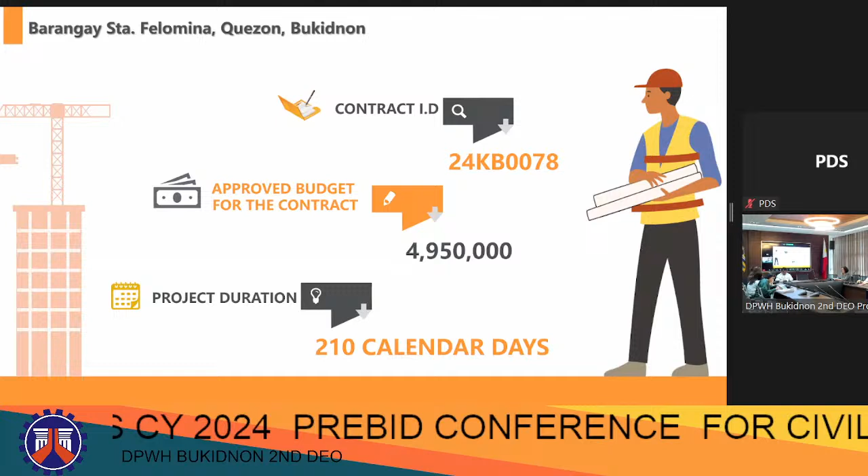Good morning, everyone. So, next, I'm going to present number 2 in the list of last number 8. Construction of multipurpose building, City Hall, Barangay Santa Felomina, Quezon, Bukidnon. With contract ID 24KB0078, approved budget for the contract 4,950,000. Project duration 210 calendar days. The location of the project is 25.2 kilometers from Quezon Municipal Hall and 46.2 kilometers from DPWH Bukidnon Second DEO.

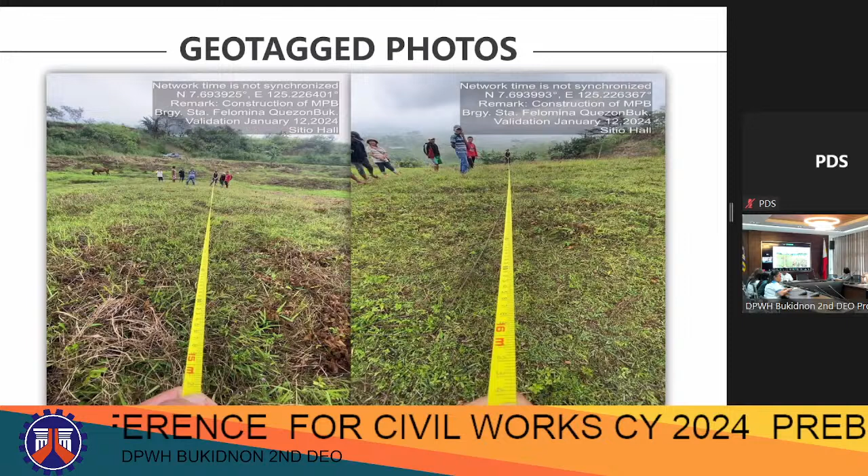These are the geotag photos. So, it has been validated. Next is the perspective.

For the scope of work: construction of one-story barangay hall with floor area of 146 square meters, consisting of complete structural components - footings, columns, roof beams, and slab.

Complete roofing components: roof truss, framing, purlins, pre-painted metal sheets and roofing accessories, fascia board, gutters, and flashings. Complete exterior and interior walls with cement plaster finish and painting works.

Installation of complete doors and windows. Installation of ceiling for exterior and interior with painting. Installation of tiles for interior floor area, toilet and toilet walls.

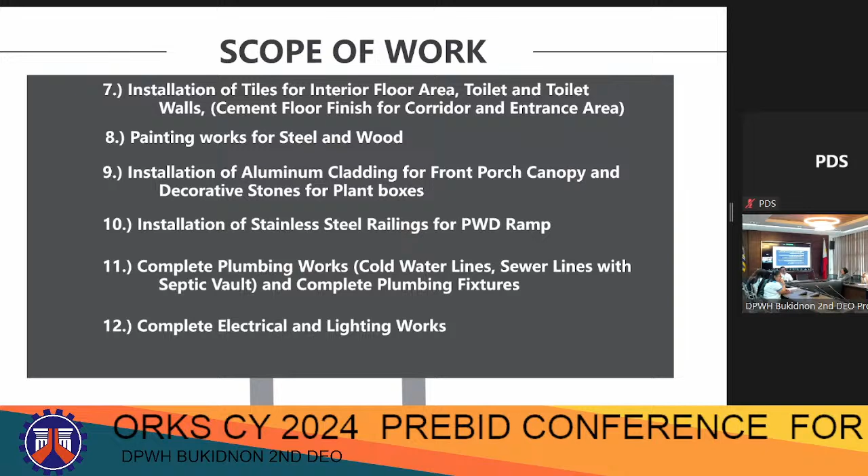Cement floor finish for corridor and entrance area. Painting works for steel and wood, installation of aluminum cladding for front porch canopy and decorative stones for plant boxes, installation of stainless steel railings for PWD ramp, complete plumbing works including cold water lines, sewer lines, and septic vault, and complete plumbing fixtures. Complete electrical and lighting works.

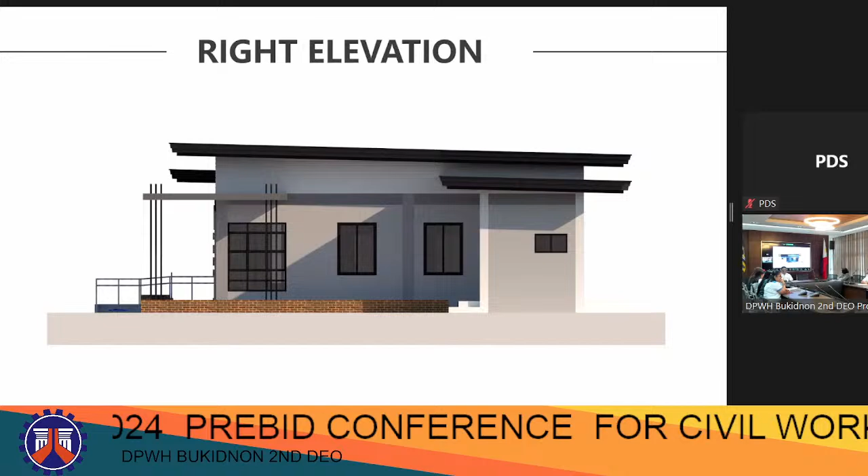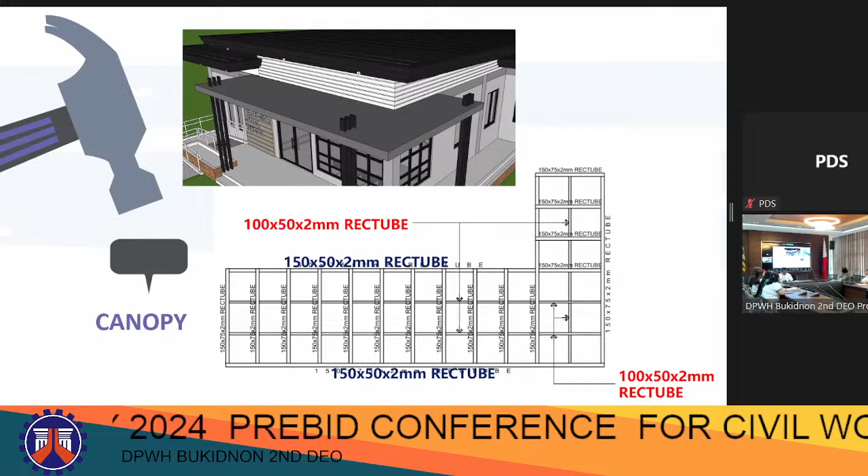For the canopy, we used 150 by 50 by 2mm rectangular tube as the main member, same for the web. For the ramp details: 38mm stainless handrail and 38mm stainless baluster.

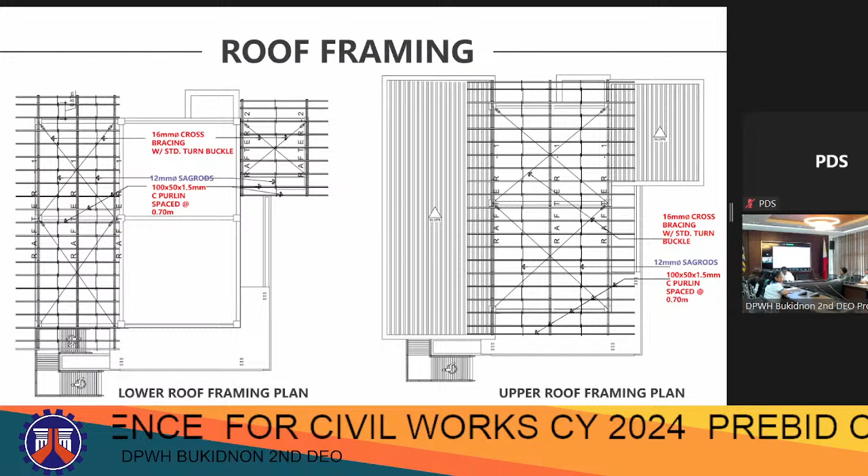For the roof framing, 16mm is used for cross bracing, 12mm for the sagrods, and for the purlins it's 100 by 50 by 1.5mm.

For the rafter, top and bottom, we used two 50 by 50 by 4mm angle bars, and for the web, two 38 by 38 by 4mm angle bars.

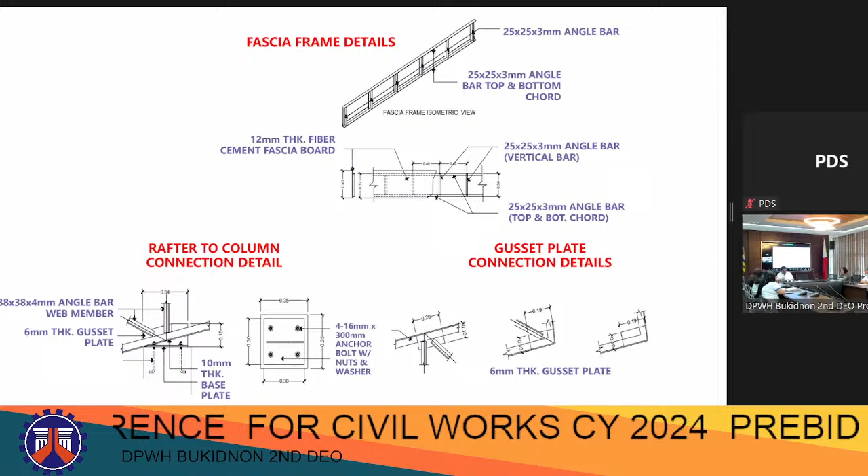For the fascia, 25 by 25 by 3mm angle bar and 12mm thick fiber cement fascia board were used.

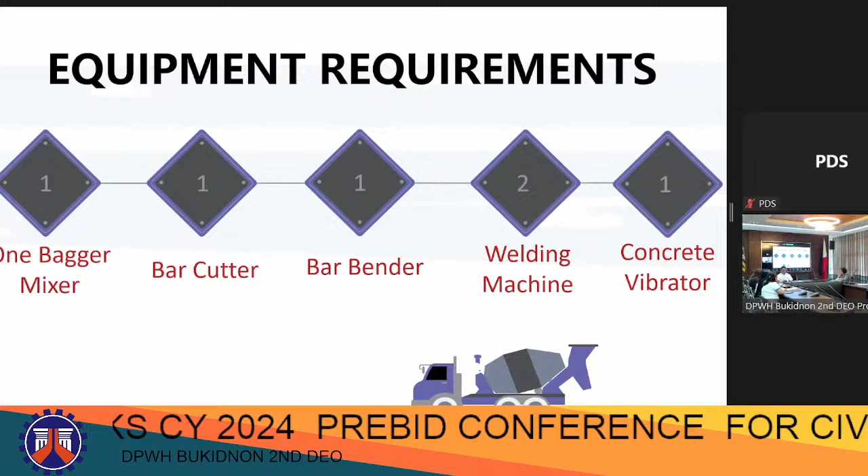So the next one in the diagram is number 8. We're beside number 2. Yes. The next is number 8 on the list.

Construction of multi-purpose building, covered court, Barangay San Roque, Quezon, Bukidnon. Contract ID 24KB0084, approved budget for the contract 4,950,000 and the contract duration is 210 calendar days. The location of the project is 10.80 kilometers from Quezon Municipal Hall and 31.80 kilometers from DPWH Bukidnon Secondary Hall.

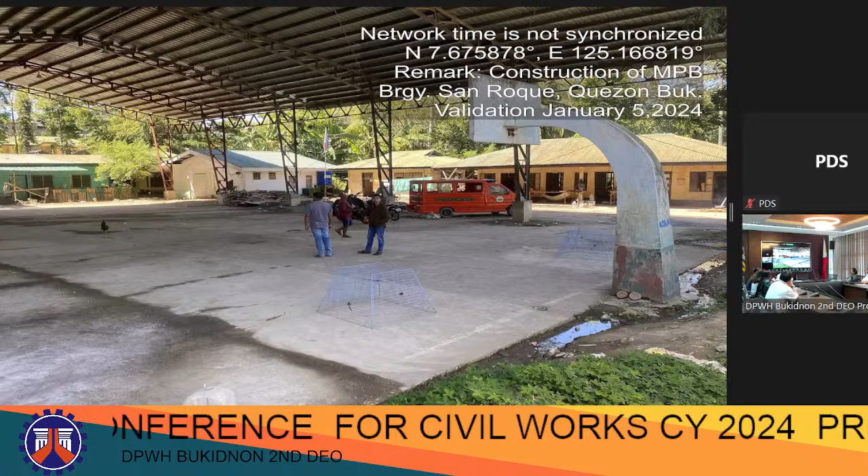Next is the geotag photos. This is the existing covered court. It doesn't have this perspective yet.

The scope of work here is the provision of canopy roofing and steel framing, two sections: 2.56 meters by 20.81 on the short side, and on the long side 2.56 by 32.50. Only one can be placed here because the new legislative building is on the other side.

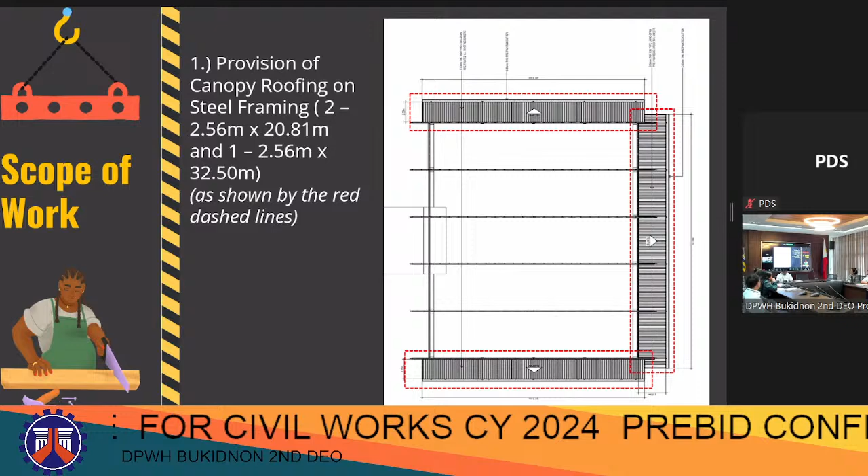Provision of 5-layer concrete bleachers on the long side, 18.5 meters in length. Provision of spandrel on both ends. Provision of 2 sets of movable basketball rings with complete accessories.

Floor topping on existing concrete slab. Provision of complete roofing accessories: gutters, flashings, and downspout. Complete electrical and lighting works. Complete painting works for masonry, concrete, bleachers, and steel.

So here is our floor plan. The slab is existing, but we will do floor topping. For the shed roof plan, we used 0.50mm thick rib type and gutter.

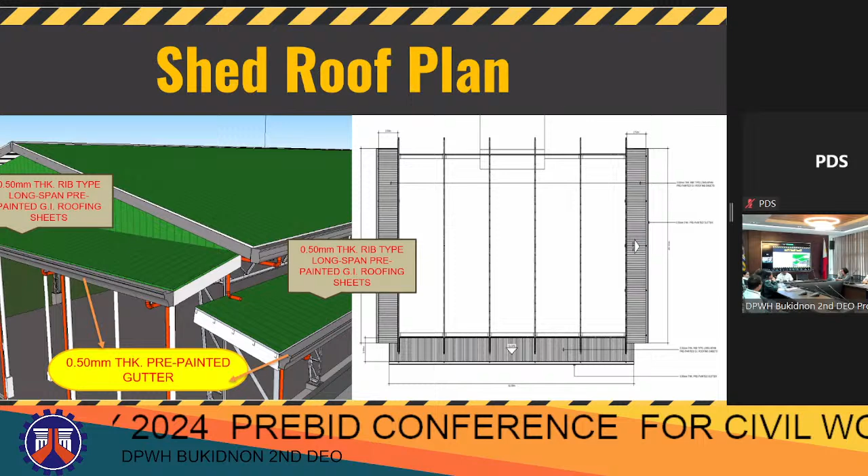For the shed roof, we used 45 by 45 by 4 angle bar on top and bottom, and for the web, 38 by 38 by 4mm angle bar. For the spandrel details, we used 75 by 50 by 2mm C-channel.

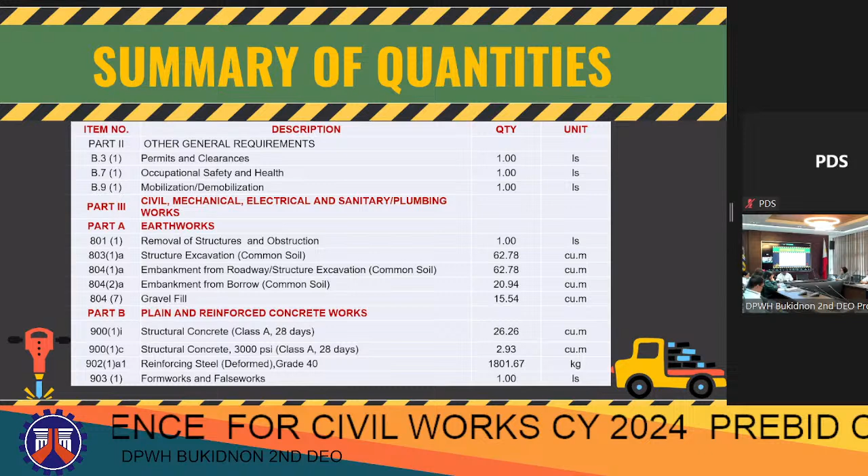For the summary of quantities, it was passed at the bid bulletin. For the equipment requirement: 1 jackhammer, 1 cutting outfit, 1 concrete saw, 1 plate compactor, 1 bagger mixer, 1 bar cutter, 1 bar bender, 2 welding machines, 1 cutting outfit. That's all.

Questions with respect to budget number 4? Yes.

Good morning, everyone. I will be presenting to you the fourth project for this Prebid conference entitled Completion of Water System, Sitio Man Ohay, Barangay Dologon, Maramag, Bukidnon.

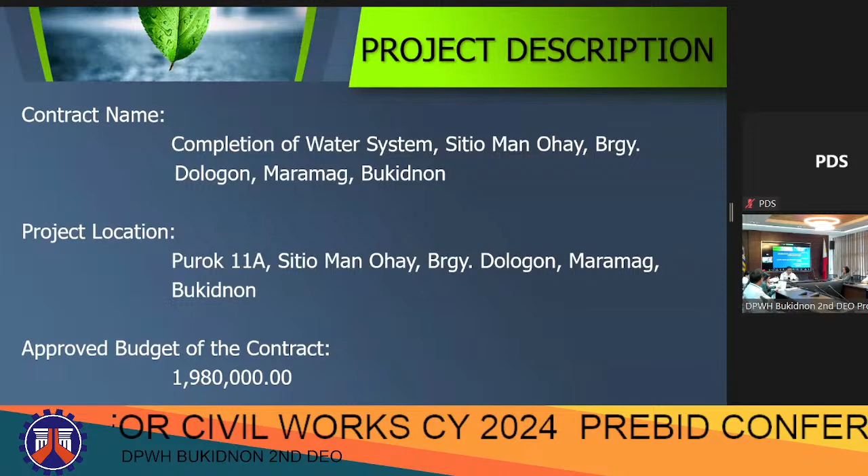The project location is at Purok 11A, Sitio Man Ohay, Barangay Dologon, Maramag, Bukidnon, with an approved budget for the contract of 1,980,000. The contract ID is 24KB0079 with a project duration of 98 calendar days, source of fund at 2024, major category of work with water supply level 2 and 3, source and pipe network system development.

The project is located 16 kilometers from Maramag Municipal Hall. The site was previously a project by DPWH, and we have the existing retaining structure for repair. Phase one consists of pump well, reservoir, and installation of transmission and distribution pipelines.

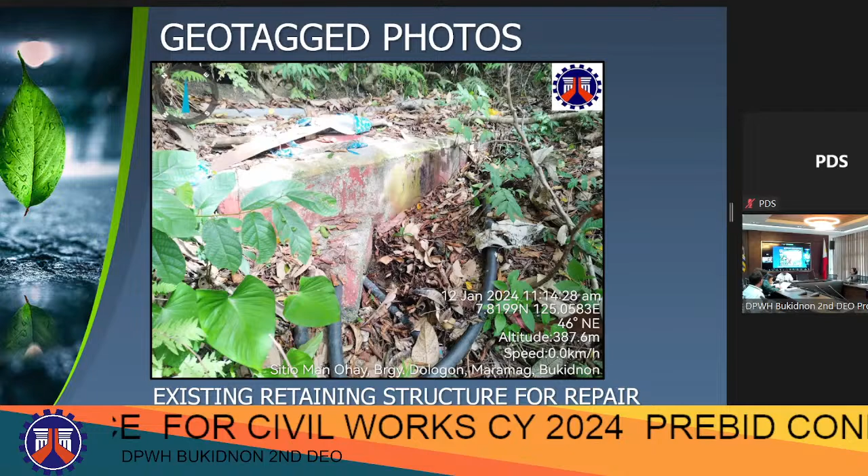For this completion works, I have prepared the improvement of the existing retaining structure. This is the existing pump well with pump house. The problem is that the pipes were not excavated according to my prepared plan before, which was 0.76 plus the pipe diameter. As you can see, this is the pipeline we need to excavate and replace, with the appropriate design.

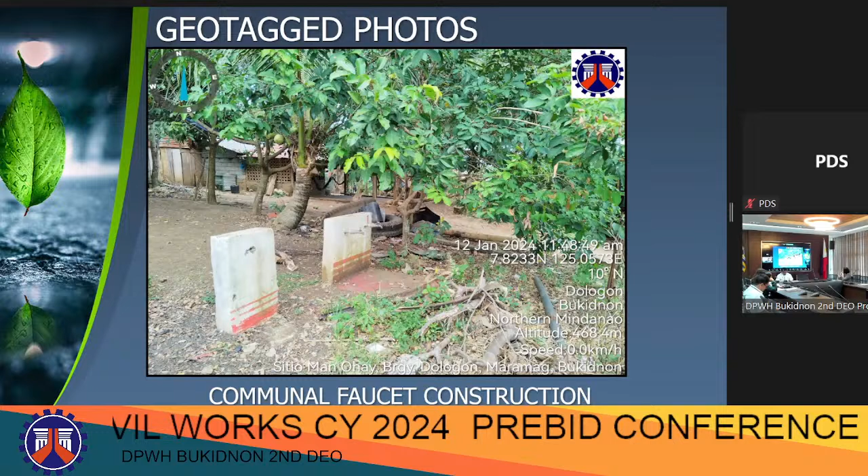We also have communal faucet construction. These faucets were not projects by DPWH, but as I have seen there, they need these communal faucets, so I will be constructing 9 communal faucets under this project.

We need electrification since the existing project there uses a generator set for the operation of their pump. They wanted to replace it with the FIBECO electrical utility powered system. This is the end of the project. I am also installing an additional transmission pipeline from the reservoir going to this particular location.

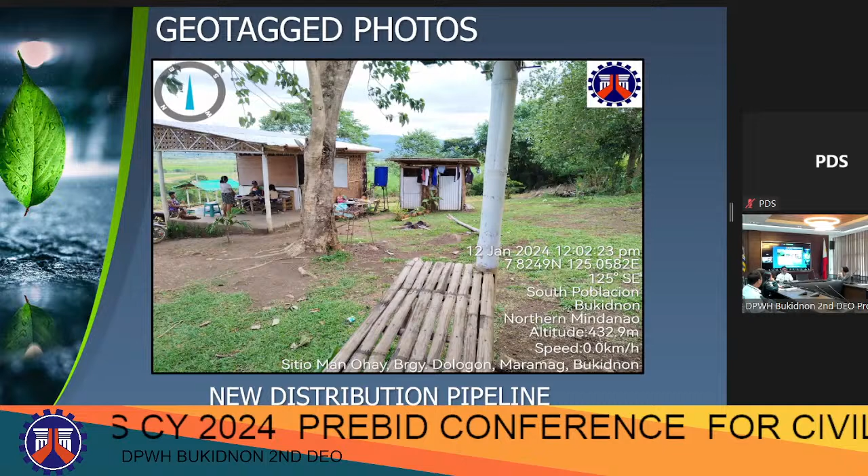The tribal community of Dato Manuel at Corpayat. Dato Manuel Morantes is the head of the community.

Previous funding is from 2020. So these are the project scope: first, improvement of existing retaining structure; second, removal and replacement of existing damaged transmission pipelines; number 3, installation of new distribution pipelines; number 4, construction of communal faucets; and number 5, electrification works. These are the items of works.

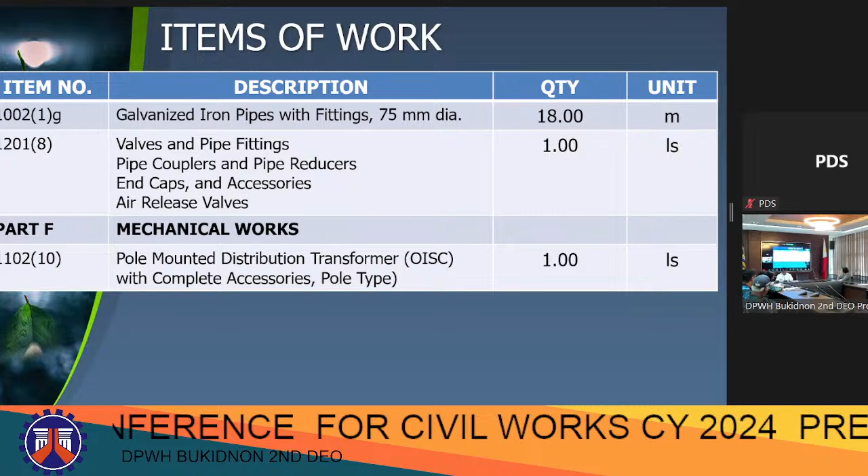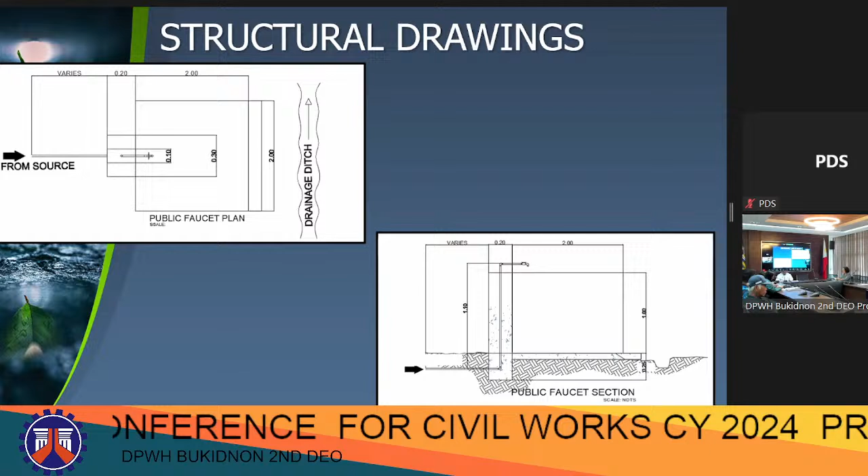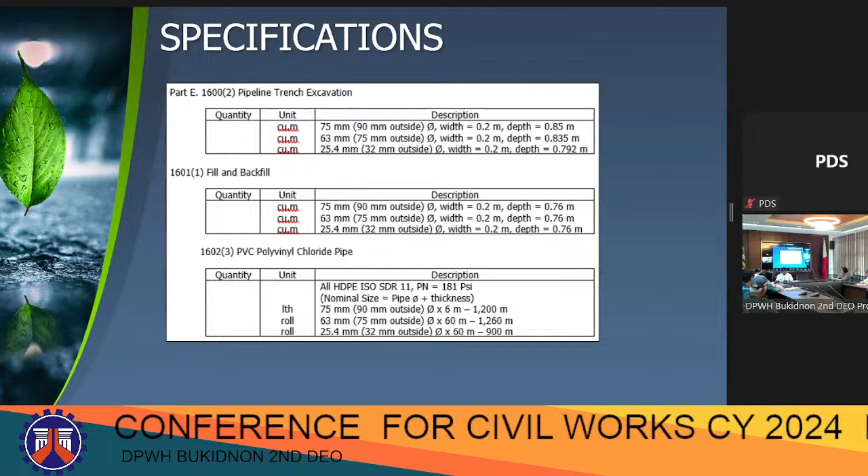For specifications, we have permits and clearances, occupational safety and health program, removal of structures and obstructions for existing infrastructure, and for pipeline trench excavation, we have a depth of 0.76 plus the pipe diameter. For fill and backfill, the minimum depth for fill is 0.76. We also have PVC, polyvinyl chloride pipe, for the installation of transmission and distribution pipelines. Thank you.

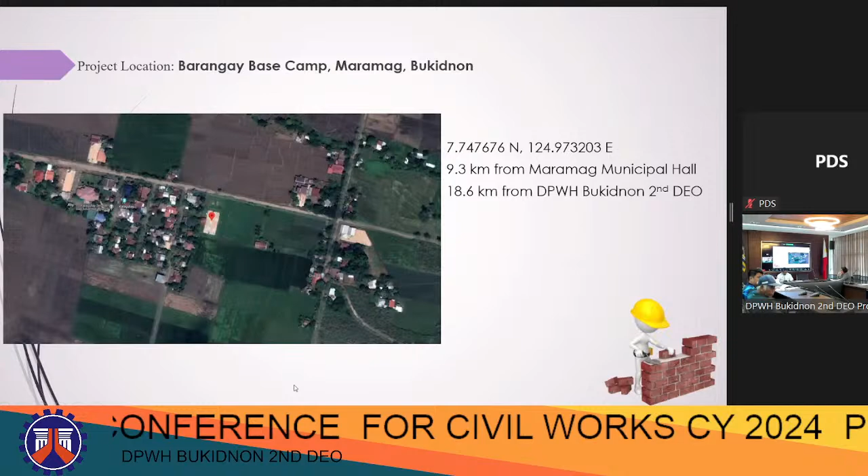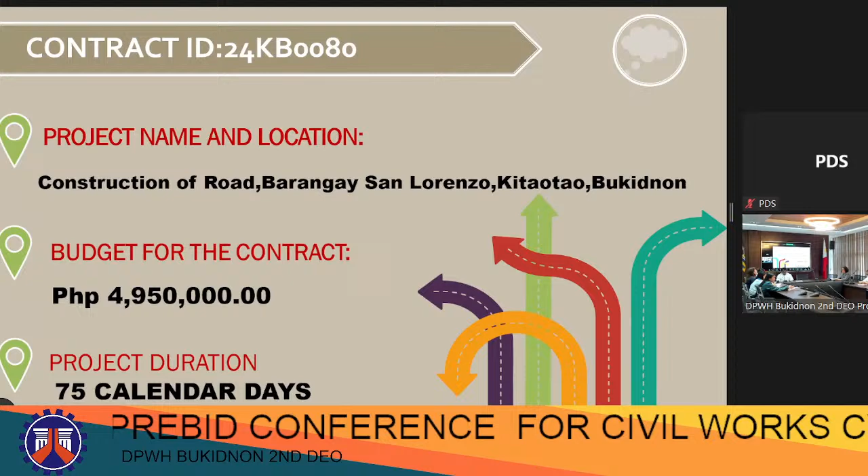Good morning once again. The next project is construction of road, Barangay San Lorenzo, Bukidnon, with a contract ID of 24KB0080. The approved budget for the contract is 4,950,000 pesos. Project duration is 75 calendar days.

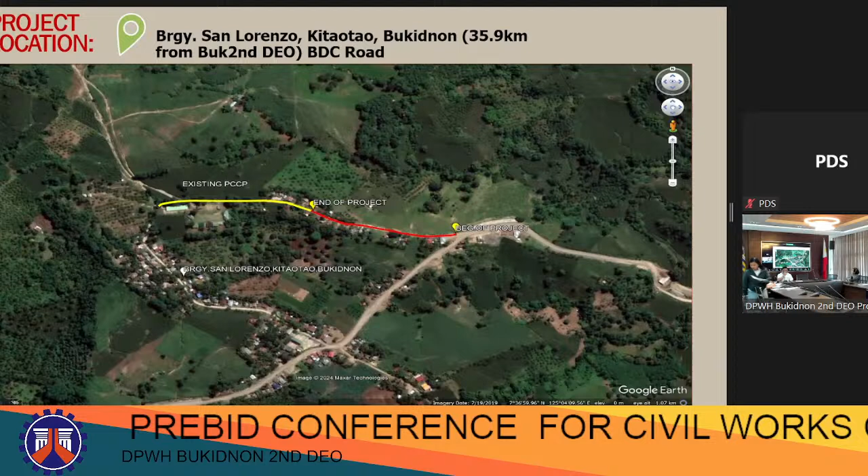Our scope of works is construction of concrete road with a total length of 265.5 meters. Our width is 2.5 meters with a shoulder width of 1 meter. Our thickness is only 200 mm. We also have installation of reinforced line canal with a total length of 129.5 meters.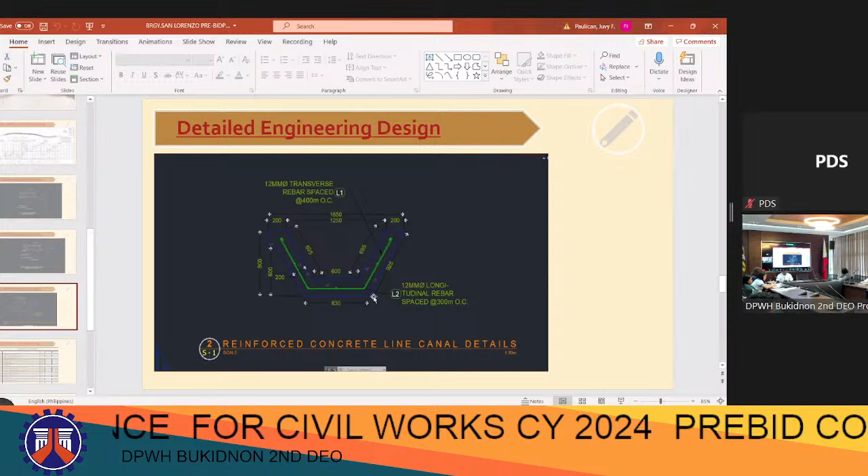This is our reinforced concrete line canal details. We will be using 12 mm longitudinal bars.

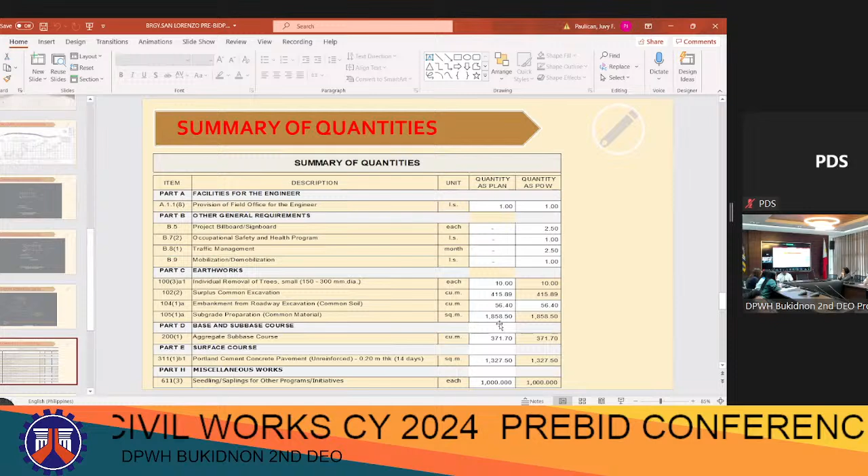For our summary of quantities, we have provisions of field office for the engineer, project billboard, occupational safety, traffic management, and mobilizations. For our earthworks, we have individual removal of trees. For our surplus common excavation, we have 415.89 cubic meters, and embankment is 56.4. We have a total subgrade preparation of 1,858.5 square meters, and our aggregate sub-base course is 371.7 cubic meters, plus 1,327.5 square meters for our PCCP.

For the removal of trees, we will replace them, with every one tree equivalent to 100 seedlings. So the total seedlings to be replaced is 1,000.

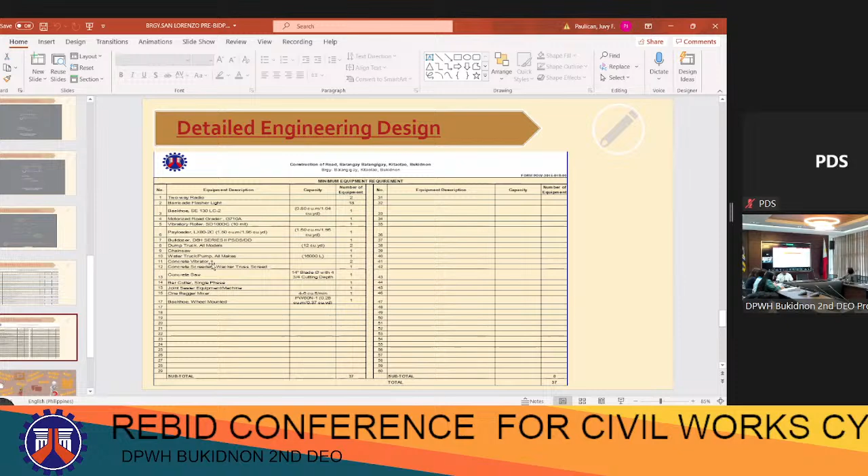For our equipment requirement, we have two-way radio, barricade flasher light, backhoe, motorized road grader, vibratory roller, payloader, bulldozer, dump truck, chainsaw, water truck, concrete vibrator, concrete screeder, concrete saw, bar cutter, joint sealer, one bagger mixer, and backhoe wheel mounted.

So that's all for the construction of road in Barangay San Lorenzo.

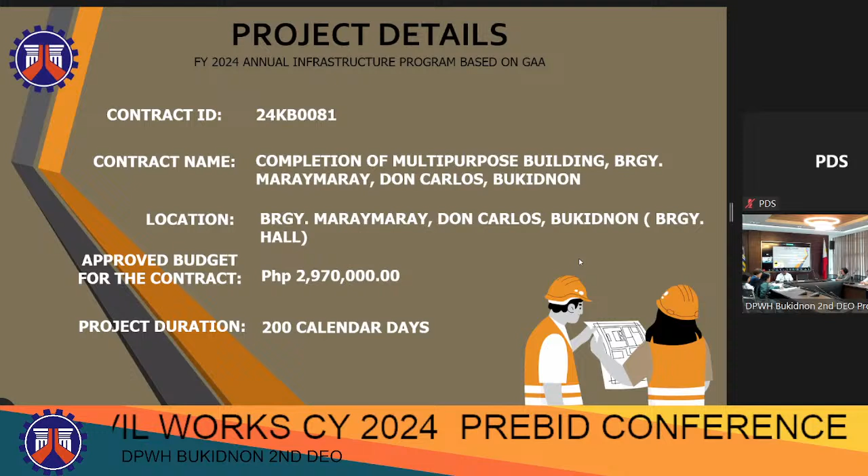Good morning, everyone. Today I'm going to discuss number 5 on the list with the contract ID of 24KB0081, with the contract name of completion of multi-purpose building, Barangay Maray-Maray, Don Carlos, Bukidnon. Location is in Barangay Maray-Maray, Don Carlos, Bukidnon, at their existing barangay hall. The approved budget for the contract is 2,970,000 and project duration of 200 calendar days.

The distance from our office to the project site is 16.6 kilometers, all concrete road. For our geotag photos...

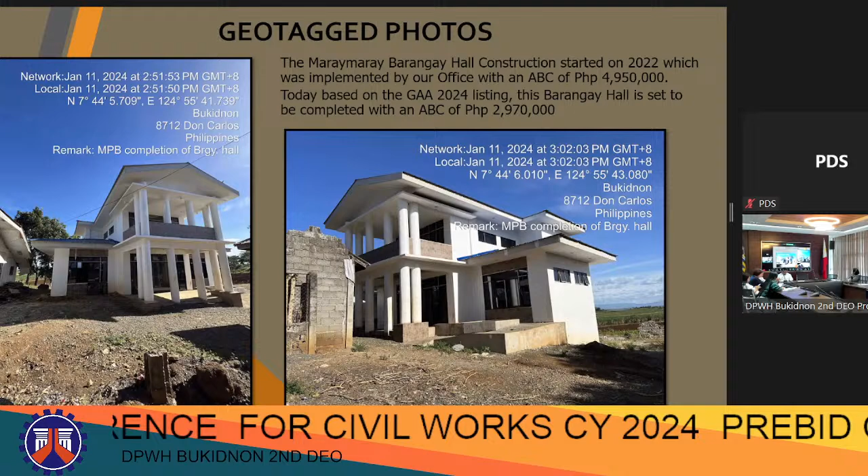The Maray-Maray Barangay Hall construction started in 2022, implemented by our office with an ABC of 4,950,000. Today, based on the GAA 2024 listing, this barangay hall is set to be completed with an ABC of 2,970,000.

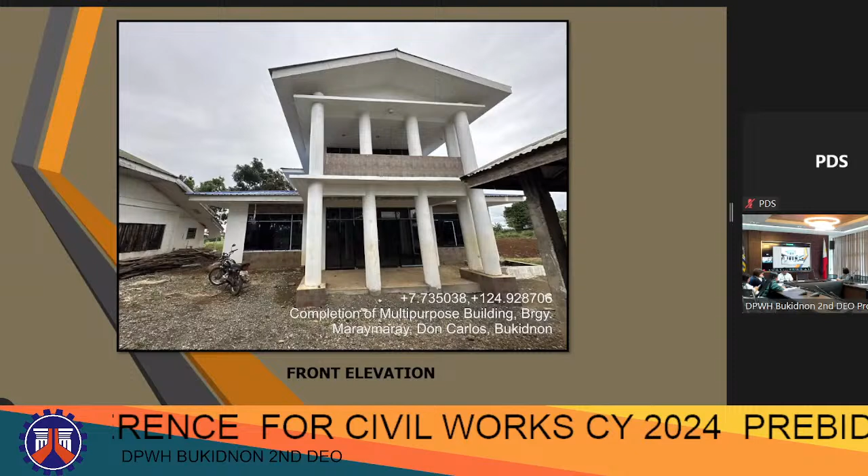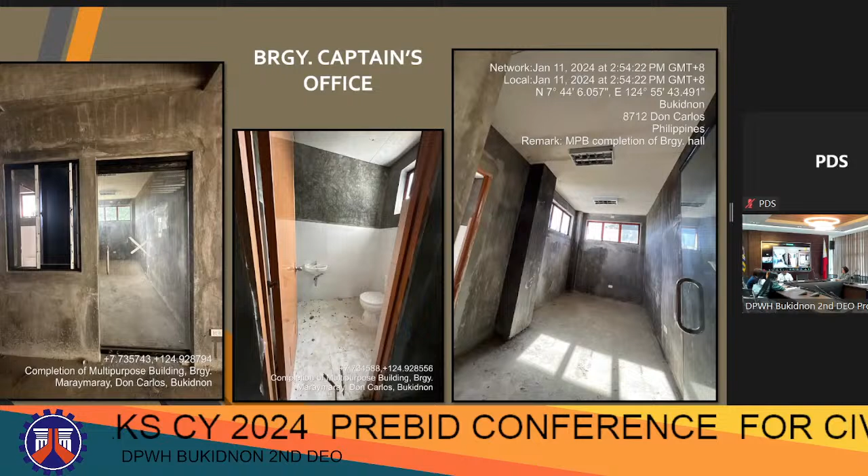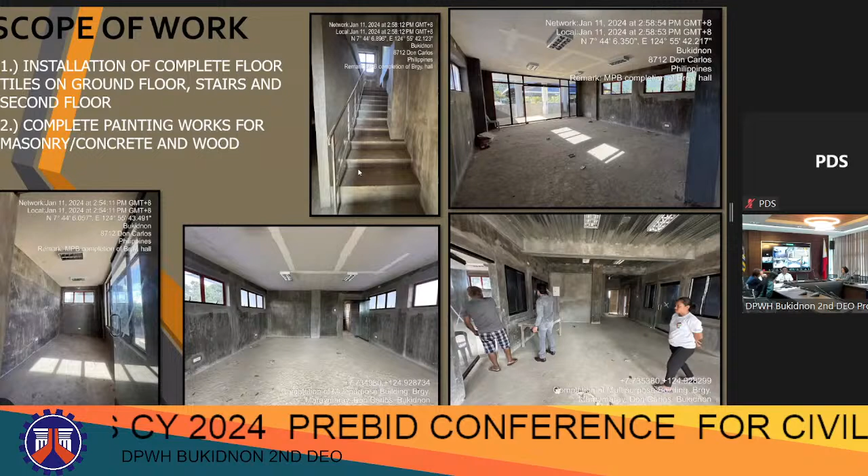So for the scope of work: installation of complete floor tiles on ground floor, stairs and second floor. Complete painting works for masonry, concrete and wood. Installation of window grills on all perimeter windows on ground floor and second floor.

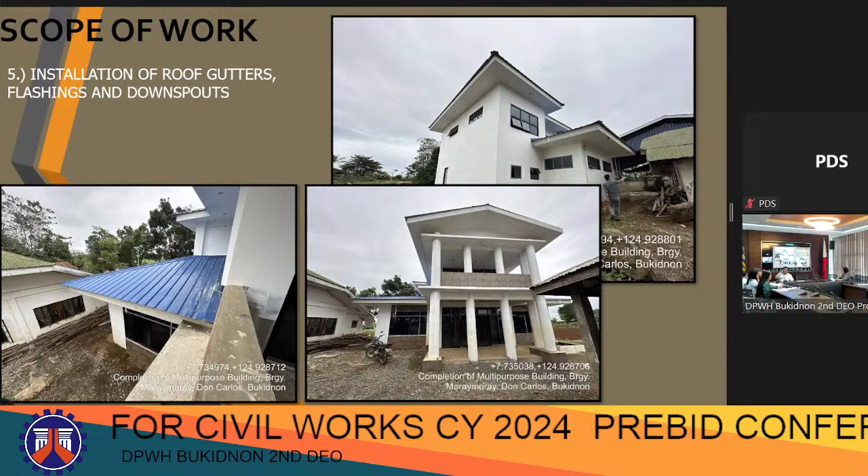Installation of roof gutters, flashings and downspouts. And installation of roof canopy on back exit platform.

Good morning, everyone. So I will present to you the next project, construction of multi-purpose building, Barangay Maican, Damulog, Bukidnon, Phase 2. With a contract ID of 24KD0082 and the ABC of this project is 4,950,000 and the contract duration is 210 calendar days.

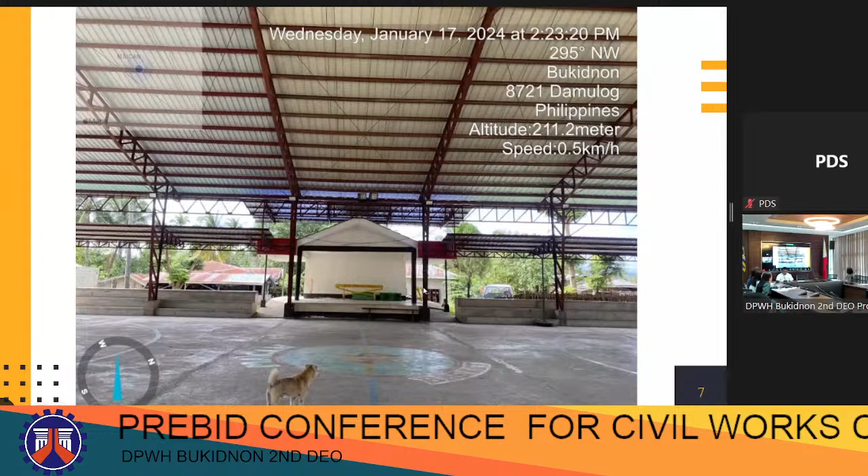So for scope of work, we have completion of covered court inclusive of additional bleachers, at least 3 layer, installation of cyclone wire type fence along the perimeter of the covered court, included na ang stage, and also provision of 2 unit basketball rings, painting for the whole slab area for the covered court, and isa rin sa ilang priority po ang provision of digital scoreboard.

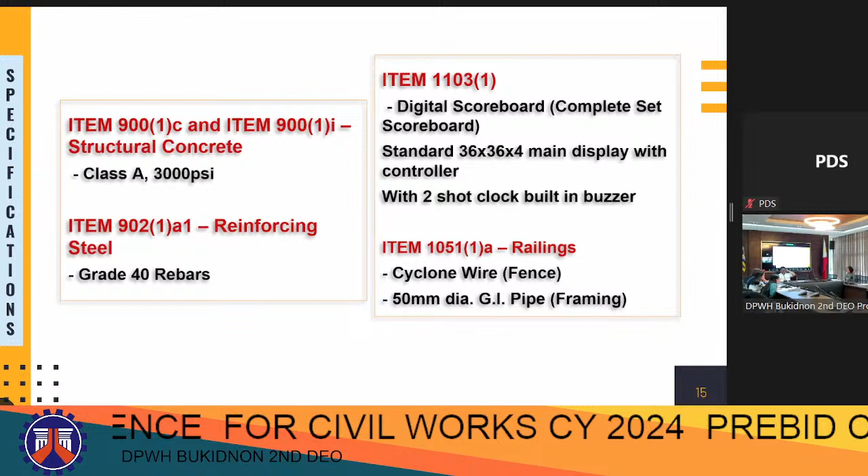And for item 11031, for the digital scoreboard, complete set scoreboard with a standard of 36 by 36 by 4 cm, main display with controller. It's not wireless, or we haven't tried a wireless plan yet. With 2 shot clocks and built-in buzzer.

Then for item 1051(1)a, for the railings, we will use cyclone wire as requested by the Kapitan. And for the framing, we will use 50mm diameter GI pipe.

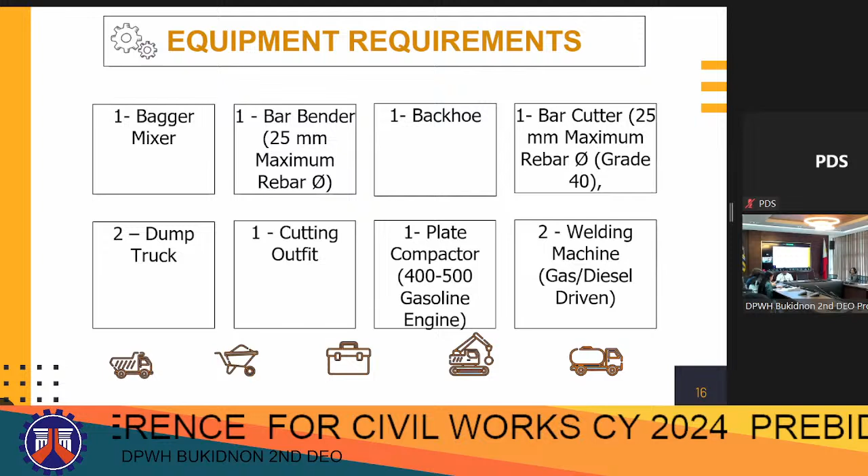And for the equipment requirements, we have 1 bagger mixer, 1 bar bender, 1 backhoe, 1 bar cutter, 2 dump trucks, 1 cutting outfit, 1 plate compactor, and 2 welding machines.

And that would be all for the barangay this time.

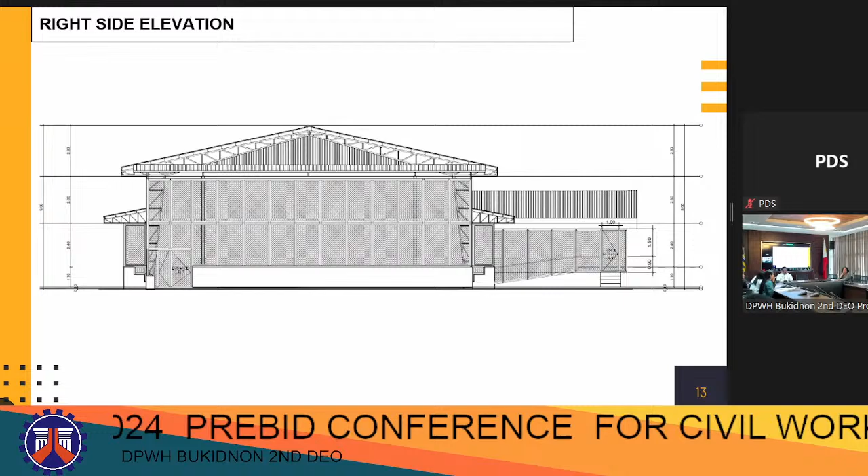So, to proceed, this is okay, I'll proceed to the next one.

So for the next project, construction completion of multi-purpose facility, Barangay Balintawak, Kibawe, Bukidnon, with the contract ID of 24KD0083 and the ABC is 4,950,000, and the contract duration is 210 calendar days. The location is 19.7 kilometers away from this office.

So for the existing structures in the area, the 5-bay is already complete, there's already an existing bleachers and an existing stage, but what they want to happen is to demolish the stage.

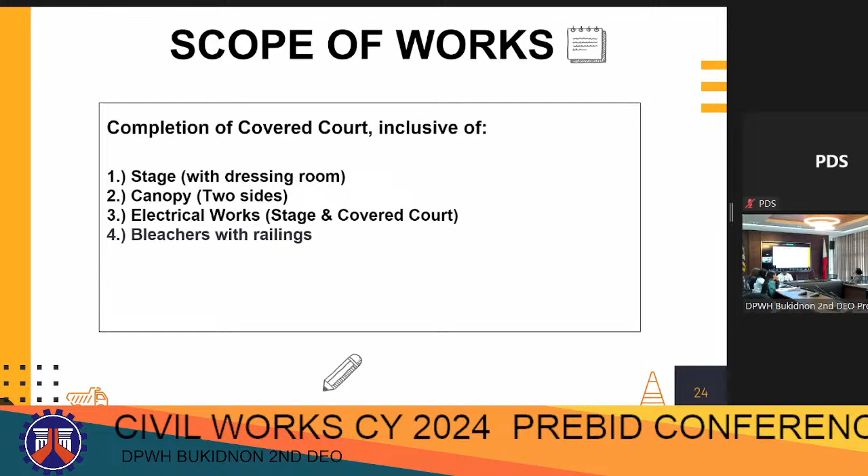Then bleachers with railings. So most likely, that's what will happen in the project - bleachers with railing, then the stage, then the canopy roof.

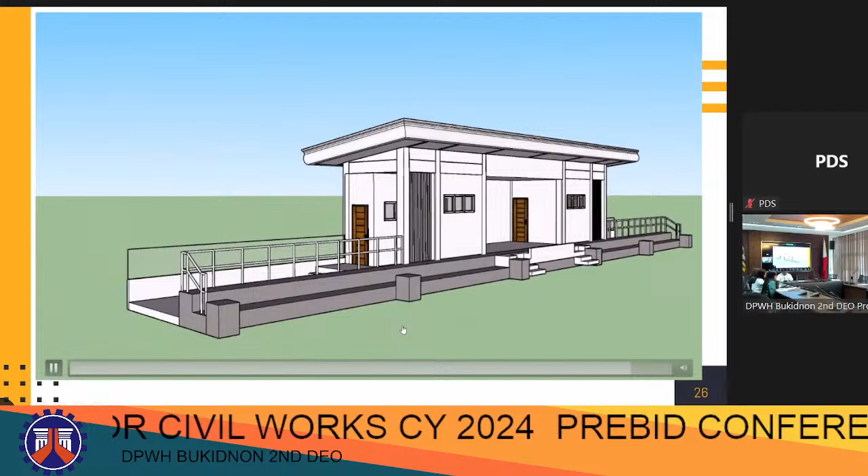For specifications, again, for item 900(1)c and item 900(1)i, must be Class A with 3,000 PSI strength, and for item 902(1)a1, it must be grade 40 rebars, and for interior ceiling, we will use 9mm thick gypsum board.

And for the toilets, we will use moisture resistant gypsum board, and for exterior ceiling, we will use 4.5mm thick fiber cement board.

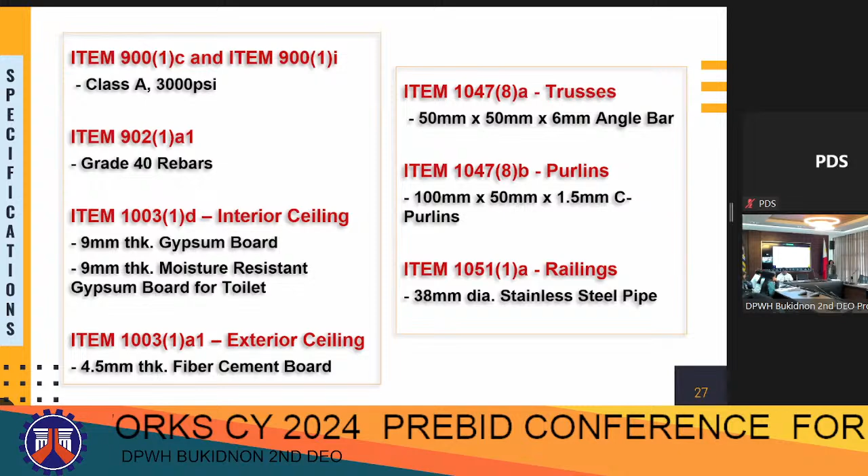And for trusses on the stage or shed roof, we will use 50 by 50 by 6mm angle bar, and for purlins, we will use 100mm by 50 by 1.5mm C-purlins. For the railings, the usual 38mm diameter stainless steel pipe.

So that would be all for Barangay Balintawak. Any questions? Our materials are standard.